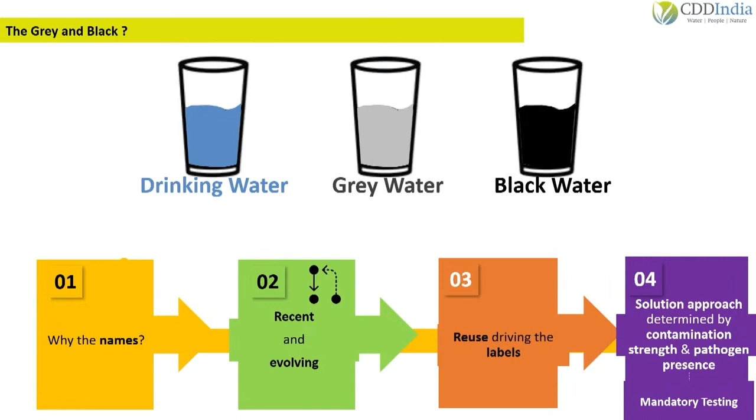Now can we move to next please? So we have this drinking water, and the next session is on black water, and then we have grey water. But black water is never black. How many have seen black water that is black? But then why do we call it black water? And grey water is not always grey. It is turbid, it may be yellowish, it may be translucent, it may be white yellow, anything. Sometimes grey too, but we call it grey.

So the whole point of liquid waste management is that we have to take care of two things, which are contaminants and pathogens. Pathogens create health hazards and contaminants create environmental hazards. Can we go next please? So drinking water, if we see from the pollution angle, has a biological oxygen demand of 2. These are the CPCB standards. And black water has a biological oxygen demand of minimum 10,000, which goes up to 50,000. And whatever is in between is called grey water. So in that sense, grey water has a very huge range.

And the problems are just different. To give a very gross analogy, somebody has got a cough, somebody might have a viral fever with cough, and somebody might have TB. You would not give the same paracetamol to all of them. So different pathogens and different contaminants require different treatments. And that is one thing which has to underlie every intervention.

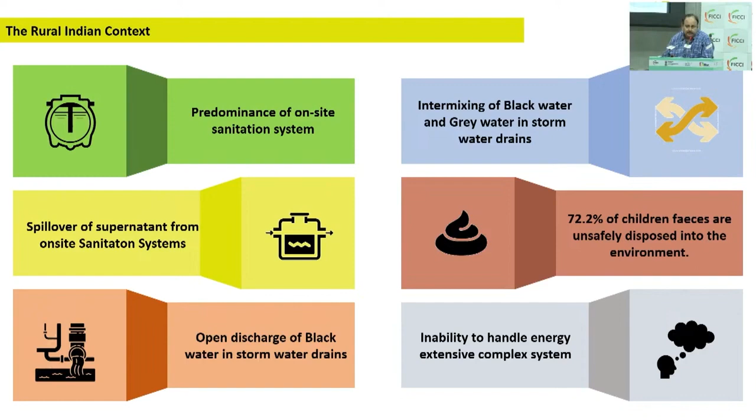And also, grey water has got many evolving constituents. What we say is grey water is considered black water in other countries, like kitchen waste. We consider it grey water, but because of its high concentration of contaminants, it is considered as black water in many countries. So the solution has to be seen accordingly.

Now these are some of the data points: how the drainage and disease burden is increasing because of poor wastewater management in rural India. You can all have a look. The figures are self-explanatory.

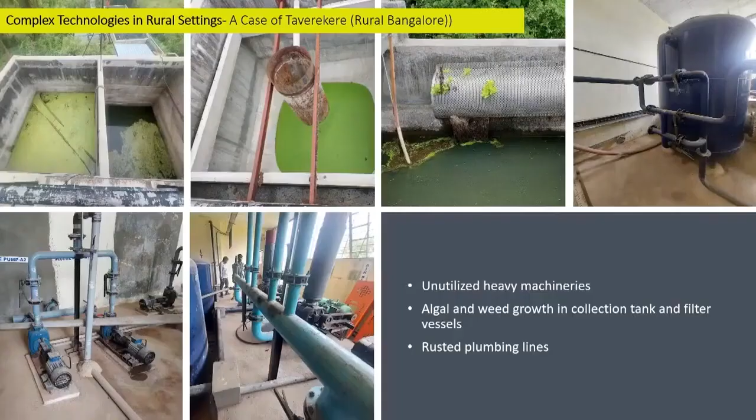Now this is what is happening. So many places we are going with complex technology in rural areas, which is simply not working. So this is a modern conventional system which has been set up 5 kilometers from our office in Bangalore, and within 6 months it stopped functioning. Now there is algal growth. So the treatment system itself has become bimar, or sick. It itself needs some treatment. So these complex solutions need not be operated in rural areas. If we do, the seeds of failure are sown from day one.

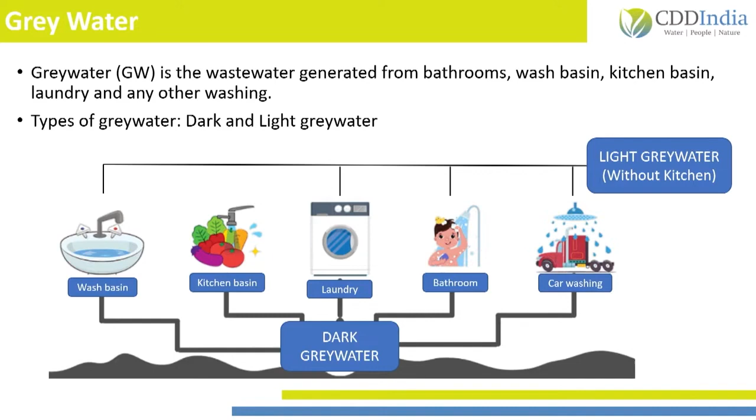So this is what I was saying. Grey water has got different constituents. You have got light grey water and dark grey water. If you include kitchen waste, the concentration of waste will increase. You need to have a different treatment system for that. And why is that important? Because of a very high public health risk, and I will come to that.

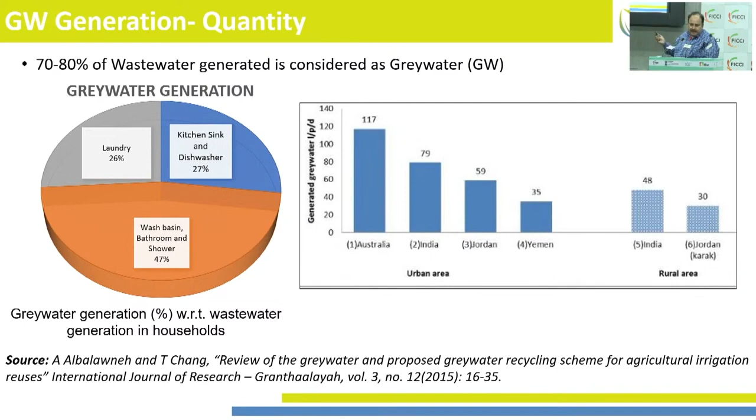So these are some of the figures. These figures are slightly dated. About 5 years ago, the per capita generation was about 55 liters, 48 liters in India. The figure will go up as JJM comes into being, because the water consumption and water availability will increase in the villages. So these are some of the characteristics of black and grey water,

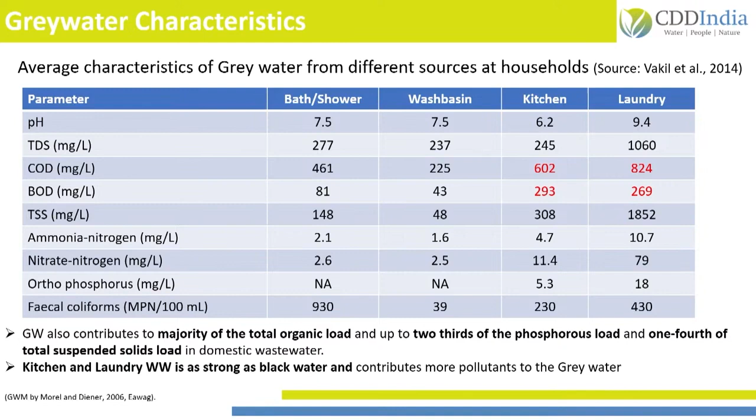and you can see that for kitchen and laundry water, the COD and BOD, which are the two key constants for defining grey water concentration, are as good or as high as black water. For others it is lesser, but the contaminants become high if you add kitchen and laundry water in the grey water.

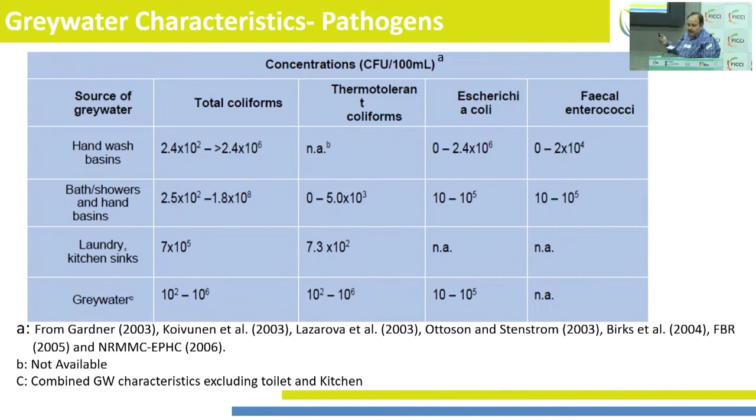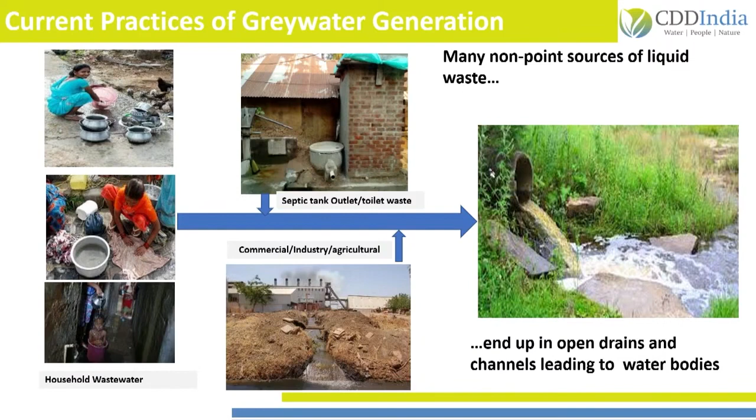These are again the pathogens. The pathogens are also present because whenever there is human urine or human waste out there, there will be some pathogens which will get mixed into grey water. So this is what is happening. I will again reiterate the point, there is no single pure grey water source in India. Most of them will have some level of contaminants.

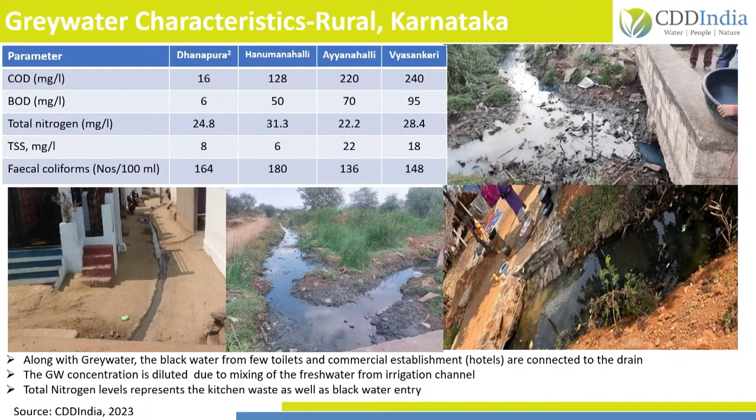And some of the characteristics you have seen in rural areas of Karnataka, where it has gone from 50 to 100. Again, wherever dilution is high, because of higher water availability, the concentration is lesser. But wherever the availability of fresh water is low, the concentration is high. So again, the contaminant load of grey water and black water will depend upon lifestyle, or what is going into that system, the relative weight of kitchen waste or other wastewater going into the system.

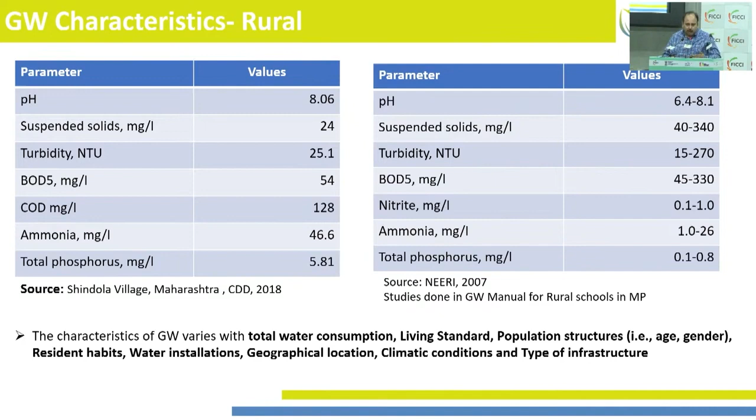So again, the main point which I'm trying to emphasize is that there is not a single fixed formula, because you have got a very wide range of problems which will depend upon various factors that define your grey water. Hence, you need to test grey water strength before providing any solution.

So soak pits are one of the most common decentralized systems available, but they would not work in high water table areas. And one more point is that soak pits do not allow nitrogen decomposition or the nitrogen cycle to get completed. Once it is in the soak pit, nitrification and denitrification, which are two very essential elements of the nitrogen cycle, do not happen.

And it has a very huge public health risk, because if nitrogen does not break down properly, it creates nitrosamines, which are carcinogenic, and there is a very high correlation between high nitrogen in water and thyroid cancer and gastric cancer. For your information, the US FDA does not allow any nitrosamine to be generated in any medical products in the sterilization process.

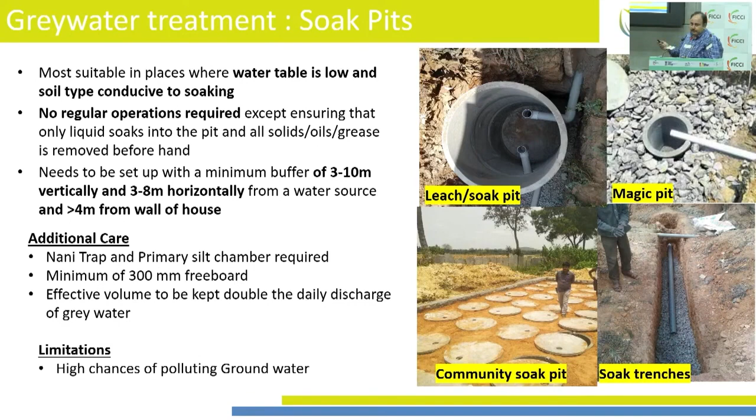And the rules that it has to be 5 meters, 6 meters, 8 meters between the water source and soak pits were based on a study done in the 1950s in India, and that study was based on certain assumptions: that it had to be sandy soil, the slope had to be a certain type, and then it was felt that the safe distance between soak pit and water source could be 4.5 meters, with a margin of error taken to 6 meters.

But whenever these assumptions do not hold, when the soil is coarse, when the water table is high, whenever there is a problem of slope, or if in the geology you have a rock surface with fractures, these assumptions will not work. So soak pits will not work everywhere. You need to be careful of the assumptions underlying this principle. Since many a time we are not aware under what assumptions these soak pits were promoted or recommended, we end up making mistakes.

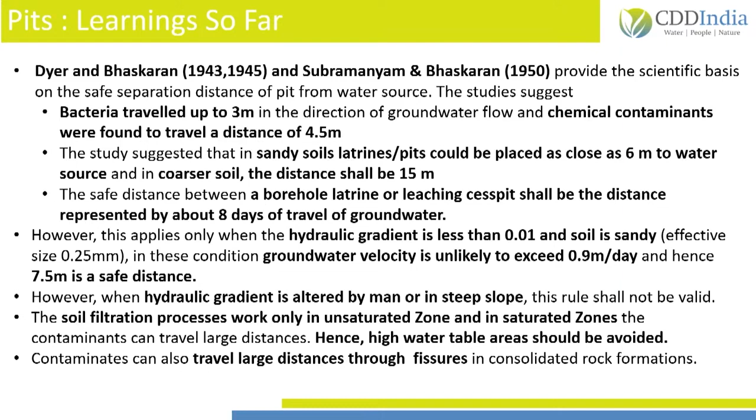Now, this is what I was saying about the nitrogen challenge. Grey water essentially has human urine, and 80% of whatever nitrogen is discharged from the human body occurs in the form of urine, not excreta. So if you have urine in your grey water system, it is going to create a nitrogen problem which needs to be fixed. Otherwise, we are in a problematic state. And again, nature comes to the rescue here.

If you try to use conventional systems for nitrogen removal, it requires a huge amount of air. And the nitrogen does not get removed from the water unless you have your carbon removed. For removing nitrogen, there are two processes: nitrification, which requires excessive oxygen, and then denitrification, where an oxygen-deprived environment is required. So it requires two contradictory chemical stages, which in a conventional system will require a huge investment.

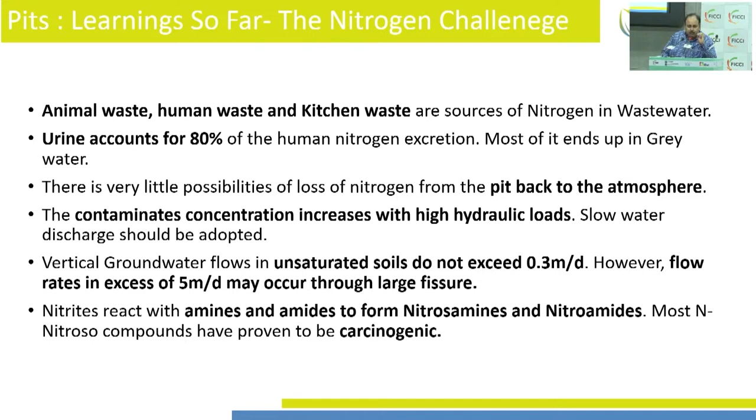The best option for treating nitrogen in nature remains application on soil, because if it is exposed to the air while going to the soil or when getting discharged, nitrification will happen. When it is seeping into the ground, the anoxic environment will take over and the natural bacteria will complete the process of denitrification. In rural areas, these nitrogen-rich elements should be applied on the ground because, A, they will reduce your fertilizer consumption and associated greenhouse gas emissions, and second, they are the most cost-effective methods of dealing with nitrogen.

So these are a few factors while dealing with grey water management. We need to take care of the strength of grey water, space availability, and soil type because of permeability. If there is black cotton soil, the water will not percolate and it will flow back into the system. Then there is high water table, because if the water table has the contaminants, pathogens will get into your water stream and can be transported any length.

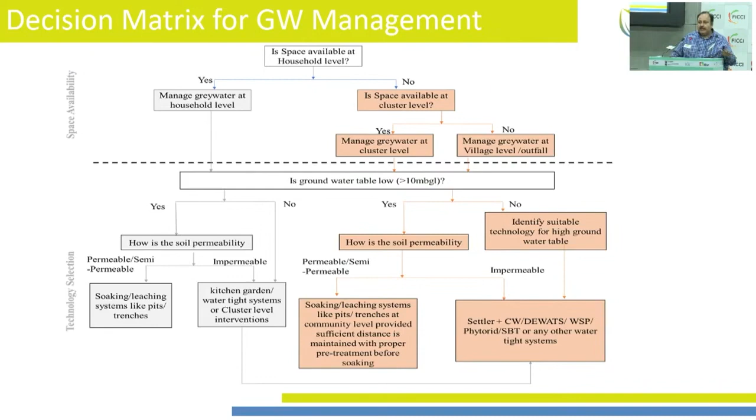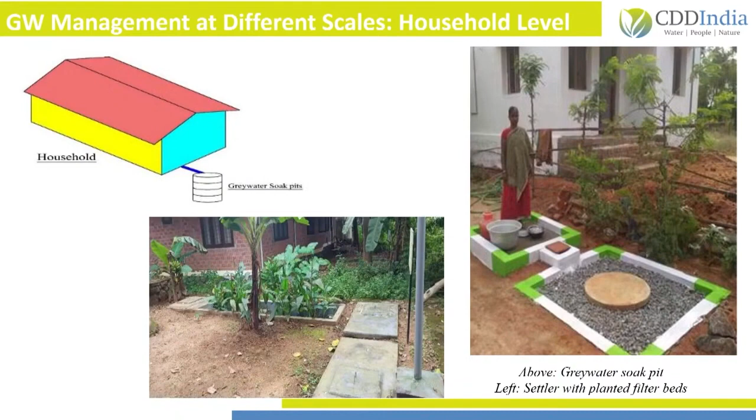Like I was saying, the 4.5 meter or 6 meter distances are for wherever there is a soil layer. If the water layer gets in between, then the contaminants and pathogens can be carried over any distance and may create a health crisis. So generally, we should have a system where we can have carbon removal and then some wetland where nitrogen fixation takes place through the root zone of the plants. These are some of the cost-effective ways it can be done at a decentralized level, at a household level, or at a cluster of households.

If you have larger spaces or a community center, then waste stabilization ponds, community soak pits or DEWATS are necessary. If you want to go for a waste stabilization pond and the strength is higher, please put up an aeration unit. And you will have to figure out how to do the maintenance of that. Otherwise, the system will not function. After a few months of operation, it will start stinking and create another odor problem.

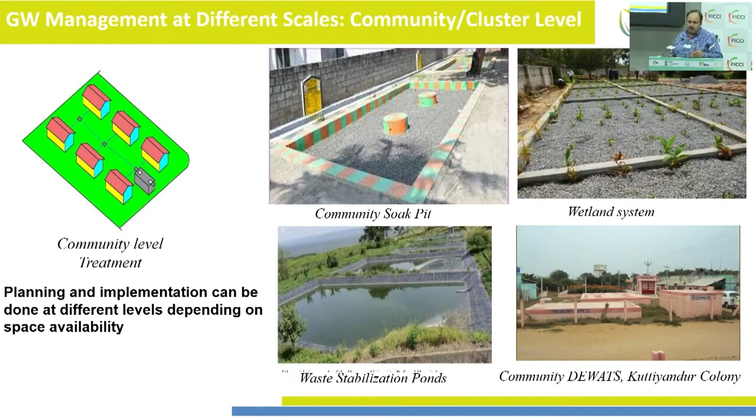So again, depending upon the strength, if it is less than 50, please go for community soak pits or any soak pit systems because it will not contaminate the environment or groundwater aquifers. But if it is of higher concentration than 50, please go for a higher order solution which takes care of the organic part.

And if you have a reuse policy, so before designing any treatment system, have a policy of reuse of grey water because this water is in scarcity and this nutrient rich water can be safely used in agriculture. So why not use it in agriculture, rather than waste energy, because a huge amount of energy will be required, and then two very contradictory environments of oxygen rich and oxygen poor will be simultaneously required to treat it.

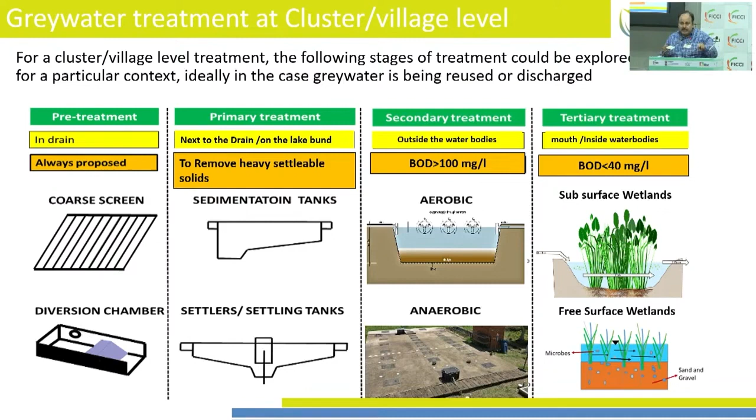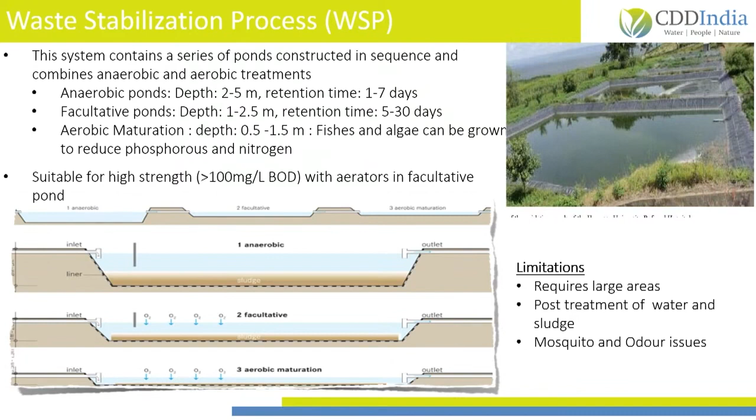So this is a waste stabilization pond. It has got three features. It is available in Google or anywhere. You can just see there are three stages: anaerobic, facultative, and maturation pond. But again, if the strength of wastewater is high, the problems will be there for its operation.

Then DEWATS is a system which has been pioneered by CDD. Again, it is nature-based, plants and operation. Only civil construction has to be taken care of, and the system can work. And then you have a free surface wetland. But again, mind here, it will not work on higher concentration. For less than 50 BOD only, we should apply these solutions.

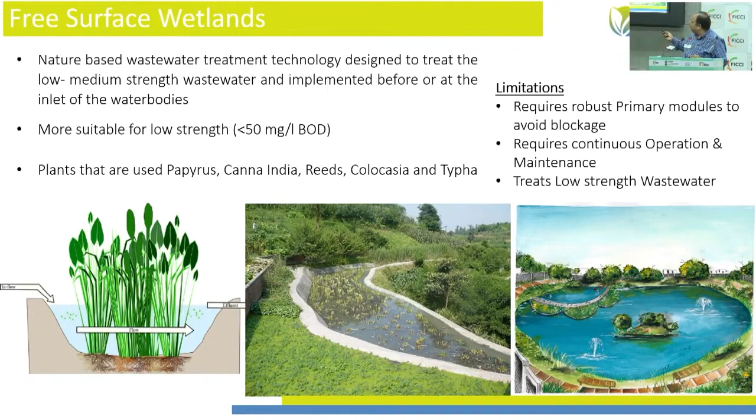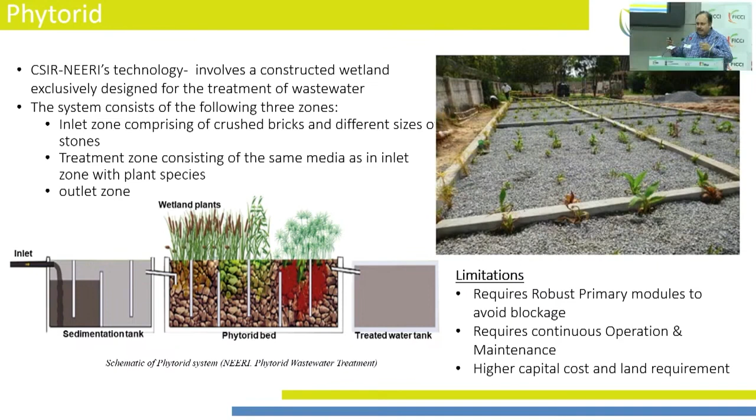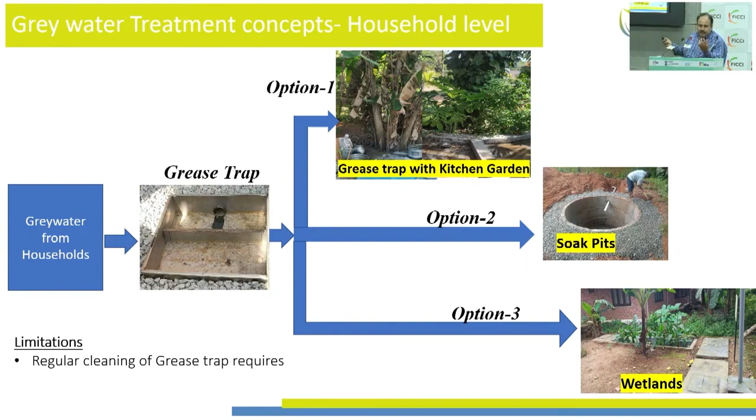So at a household level, whenever you are doing a system, please have a system for grease removal because the fat will be a component which will get into the wastewater from the household kitchen. And if you do not take care of it, again it will percolate into your soak pit systems and then it will create a film and the water percolation will decrease and the system efficiency will get reduced. And then you can have a soak pit or wetland depending upon the concentration and nature of the wastewater.

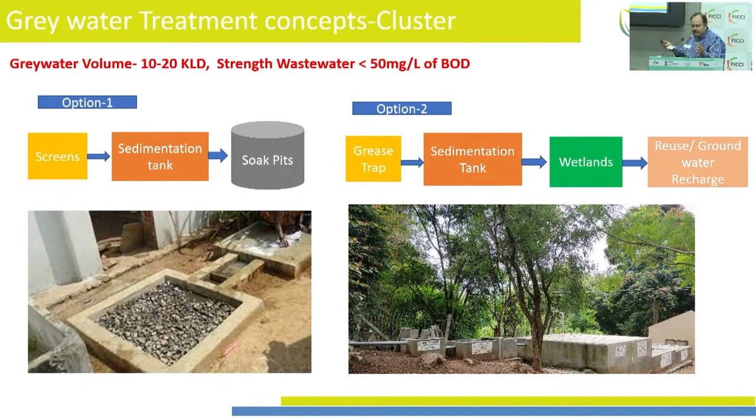So these are some of the systems which, again depending on the strength, at decentralized level, household level, community level, cluster level, can be easily designed.

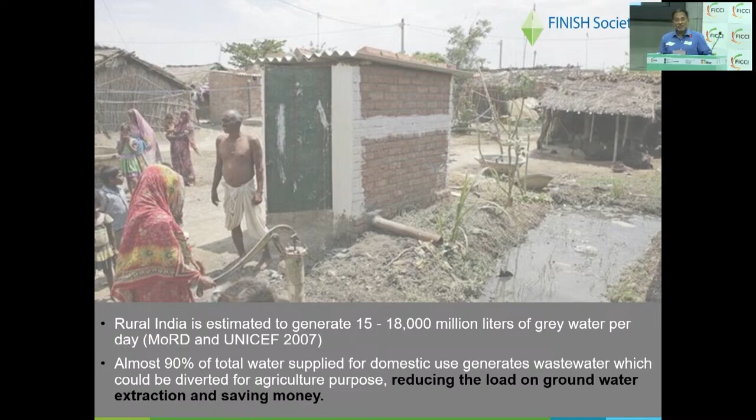So, this is a matter of great interest and also personal concern for me because as you can see, a 2007 study put an estimated 18,000 million liters of grey water being generated. And a recent article I was reading in Down to Earth estimated 31 billion liters of water daily. This is a 23rd of August article. And in that article again, they say that if 50% of that were to be treated, then it can reduce water scarcity. So that's the kind of opportunity which we have in front of us.

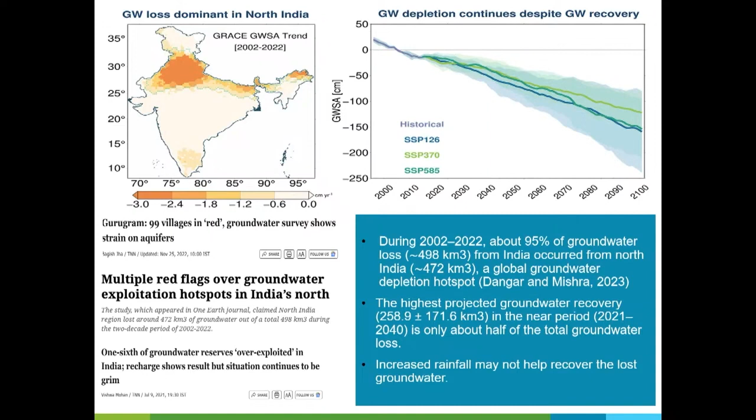And because you see, on the other side, the kind of hotspots that are there, right? And groundwater is getting majorly depleted all across. And this is a concern which can be addressed. It's also an opportunity for all of us, if we were to address the issue of grey water treatment.

So it began in the year 2009, and because the model itself was a success, it has today gone to 5 other countries, and we are now looking to expand the number of countries further. 4 countries in Africa and our neighboring Bangladesh, plus India, of course. Besides sanitation, we also work on solid waste, liquid waste, which is the topic that has been given to me here, fecal sludge, WASH in schools, and of course, we do some research on these areas.

So our initiatives in wastewater are related to water. We of course realize that it is directly linked with civilizations. When you look at civilizations, we typically find that all civilizations began along a river basin. So when they talk about the Nile, when they talk about the Gangetic Basin, that's where the importance of water actually is. And we, as an organization, do not have any technology, so we are technology agnostic.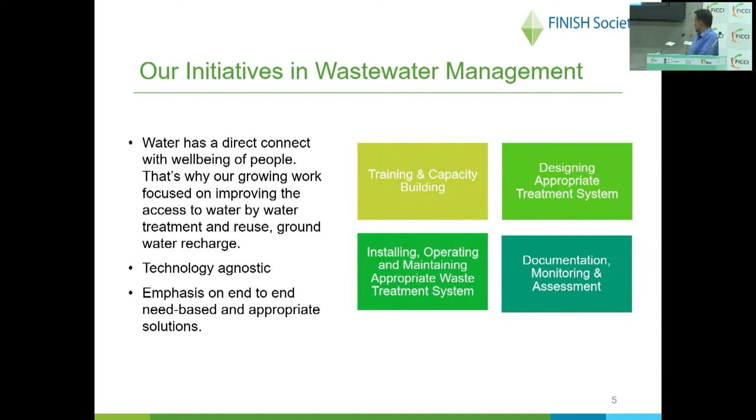We look at solutions which are most appropriate, and how we go about it is we look at it from an end-to-end perspective, with the idea that the solution has to be most appropriate and low maintenance. We do capacity building related to that, designing appropriate treatment systems, installing, operating, and maintaining the same. Of course, creating the ecosystem so that it can sustain, and monitoring before handing it over. This is our overall strategy.

A couple of areas that I would just pick out from here would be the selection of appropriate solutions. As Harshji earlier spoke about, when you talk about grey water, it has a vast gamut, right? It's quite a vista. And before we identify the solution, we try and test it. In fact, we also learned it the hard way. We were given an assignment by a ULB down south in Punampatti, and we had completed the design for treating that particular drain. Having done that, we made the mistake of not testing the input water.

When we tested the input water, we realized that there was grey water. It also had black water, that is, septic tank flows were coming into it. So we had to change our entire design model. So it is from that particular point that testing and selecting the appropriate solution came in.

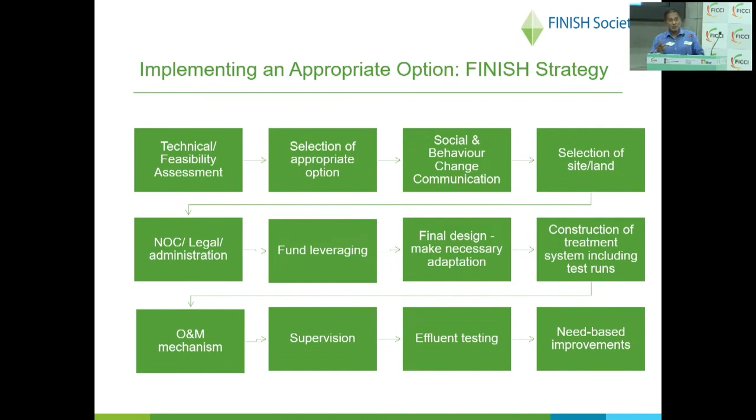And the other point that I would look at is when we begin the program, we also look at the end. So, what happens to the water that is there? How is it going to be used, and what kind of impact will there be in terms of the net result? Because this evaluation is what makes grey water treatment interesting, right? What is the kind of ROI that we are talking about? If any amount of money is invested, what returns will that particular ULB or the community get from it? And this is evaluated.

It's not an easy task, and we also have not found a very straightforward or very clear answer to it, because in many parts of the country, water is still not monetized. So that is also a challenge. But we have tried to do it through proxies, and when we see some of the examples that I intend sharing, maybe I'll be able to communicate that idea better.

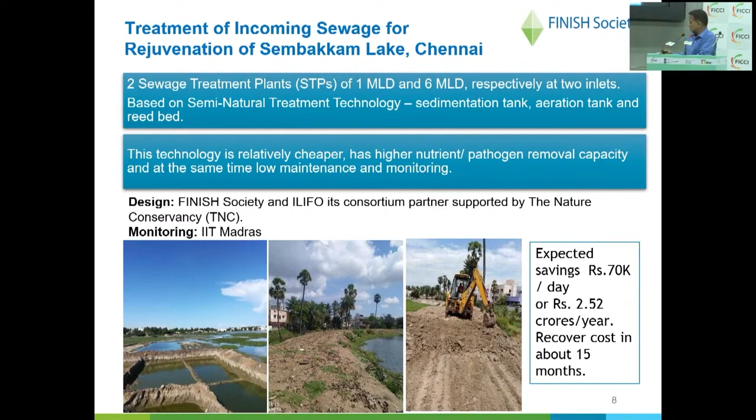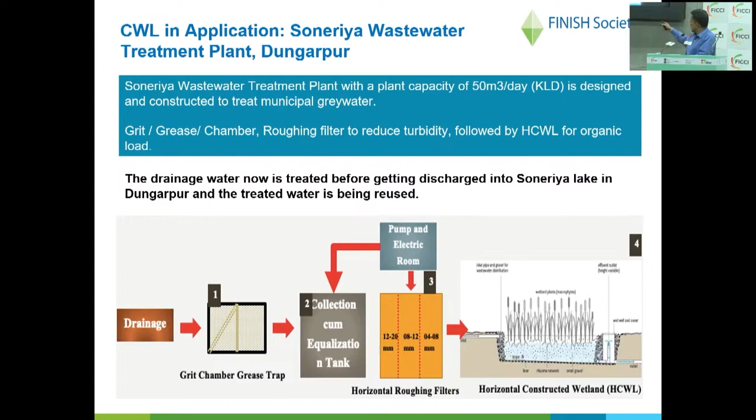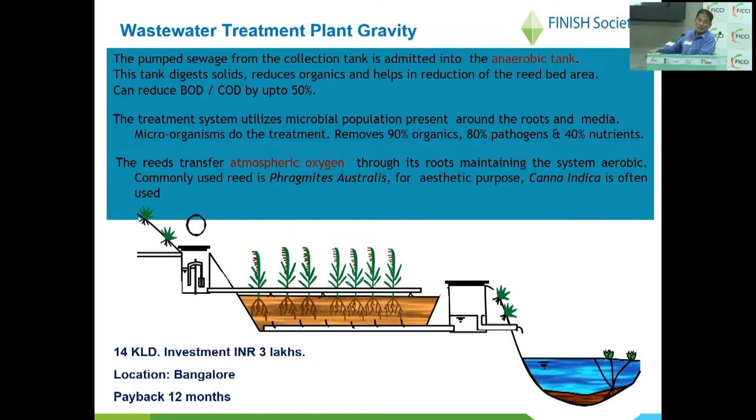We have got this type of plant, one in Bangalore, which is a 14 KLD plant. This is about 10 years old now, and it had cost then about 3 lakhs. The payback period that we calculated was 12 months.

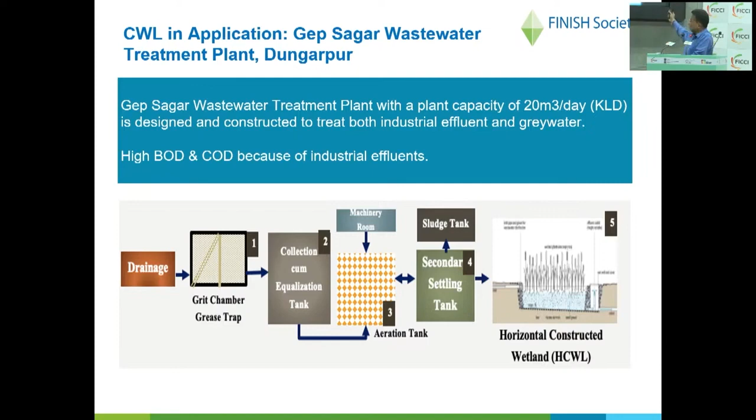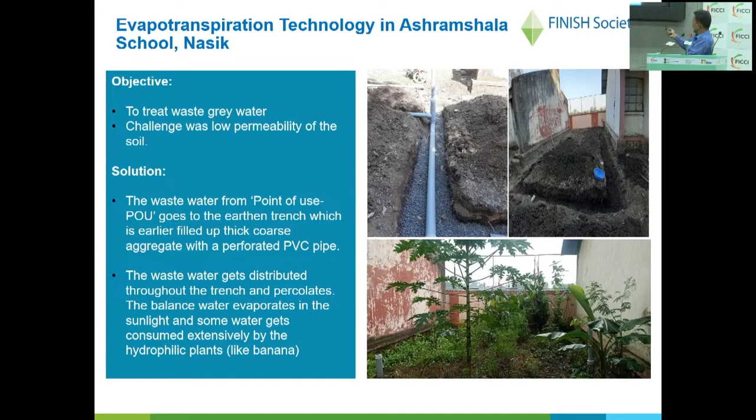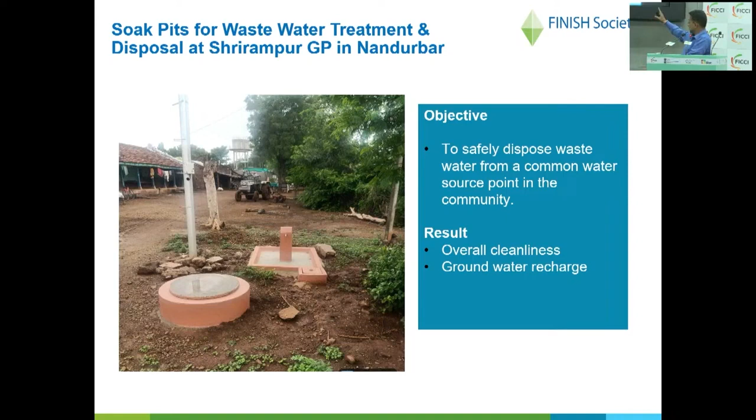This is a community system for the hand pump over there. So the wastewater that is there can be taken out and does not mess up the village.

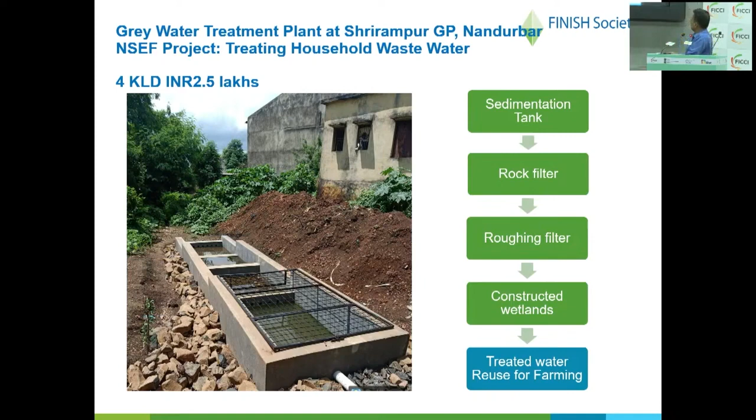Lighthouse Initiative, handful ITC is already here. ISC, of course, we are working with them at multiple locations, wherein liquid waste, solid waste, all that is a part of the initiatives there.

IEC is another key component in the entire thing, because in our experience working on grey water, we have noticed that without behavior change, getting the community involved in the process, things fail. While doing this Dungarpur plant, for example, it was bang in the city, and without getting the community on board, in the initial days people would come and throw plastic bottles in the wetland, or choke the filters and not maintain them. So we had to organize the community, get the shopkeepers on board, so that there was somebody to look after the plants, because our presence is only limited — we are going to withdraw from that side. So behavior change is an integral part of the entire process.

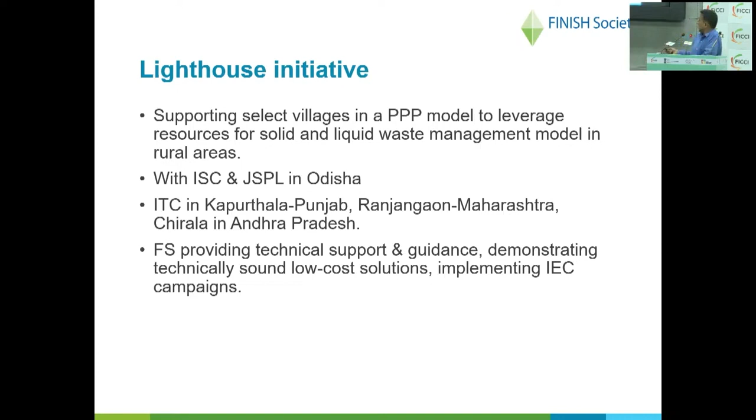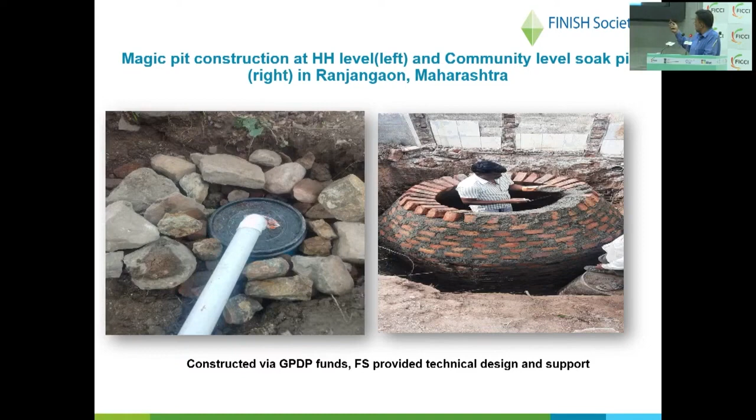There's a picture from one of the ITC areas. This is again a community level soak pit, what my team calls a magic pit construction, in Ranjangaon. Thank you.

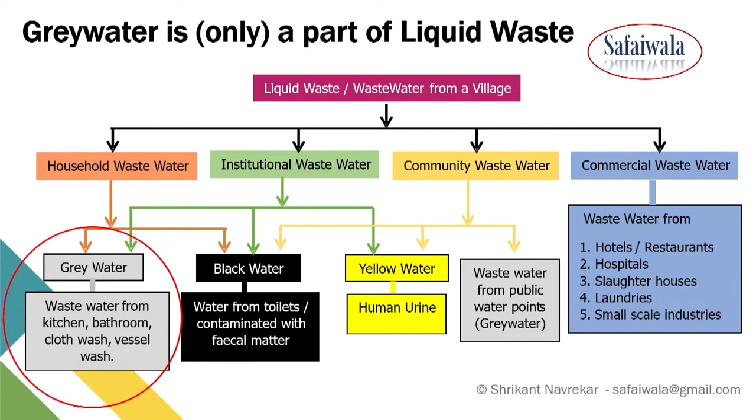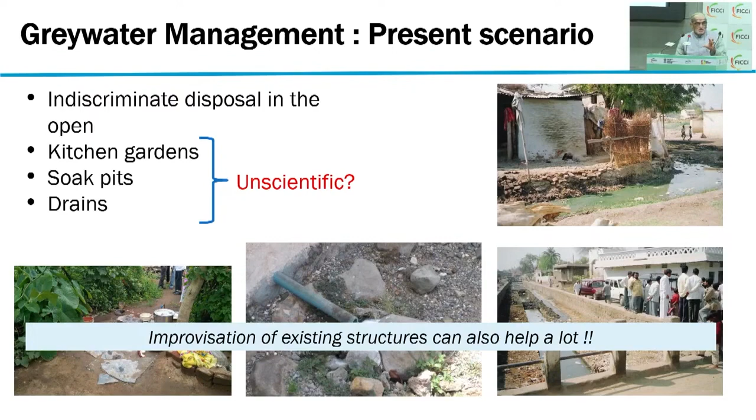So improvisation of existing structures should also be a form of our program, so that within the budgetary limits or within the limits of the people, we can improvise the scenario.

Now, what could be the appropriate solutions at decentralized level? We all know that like solid waste management, there are also 3R in liquid waste management: reduce, reuse, and recharge. For reduce, there are no technologies, but judicious use of fresh water is very important, so that minimum quantity of grey water or minimum quantity of liquid waste is generated.

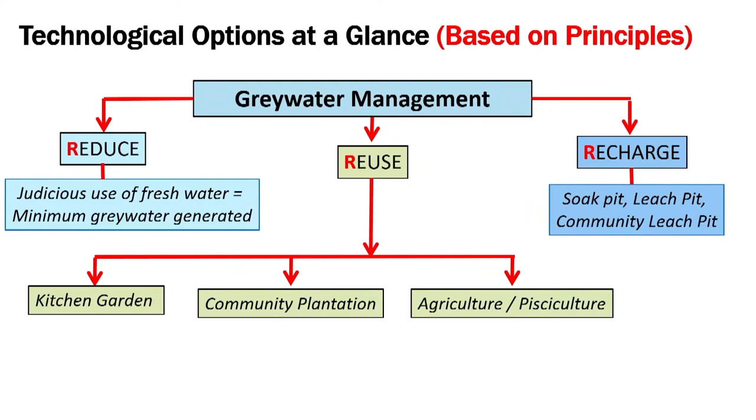Now this is based on principles, but again based on levels. The first level would be decentralized, that is household level management. And I would insist that we should first start with the decentralized level, whereby we can have kitchen gardens or pits. But it is observed that in a GP, if this decentralized technology is not possible, we immediately jump to the centralized one.

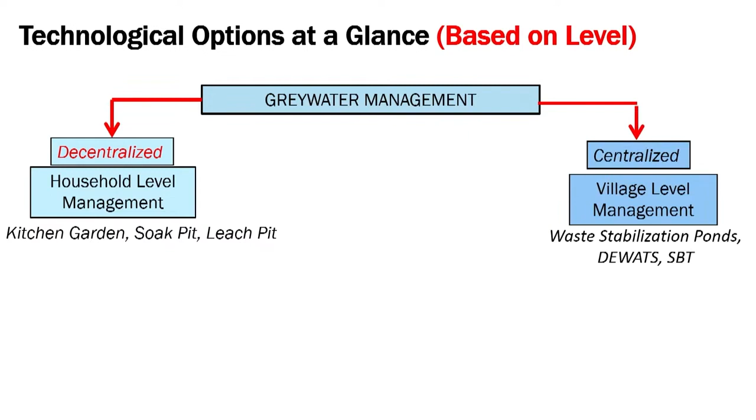But we should keep in mind that in between these two, there exists one more level, that is semi-centralized. What is this? Now, this again has two subparts.

One is management of greywater from a group of houses where decentralized treatment is not possible collectively. Second, in a village there exist public water points like hand pumps, stand posts, etc. that also need to be managed. This comes under semi-centralized or community level or cluster level management of greywater.

Based on level, there can be three levels in a GP where we can manage greywater. There can be situations where a mix of these three also needs to be considered. It is not that in a given GP only decentralized will work, or only centralized or semi-centralized is necessary. There can be a mix of all these technologies as well.

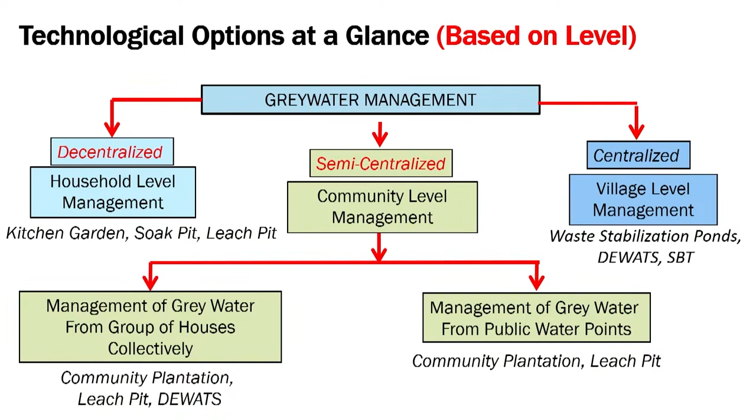Now, before going to the technology part, some pre-arrangements are very, very essential. What are these pre-arrangements? Let's look at this scenario.

For example, this house has a single assigned place where everything is done - bathing, washing clothes, scrubbing utensils, all at the same spot, not a proper platform. If in your plan you provide this house with some technology - maybe a soak pit, a leach pit, or a drain - can you ensure that this water actually goes to that treatment unit? You cannot.

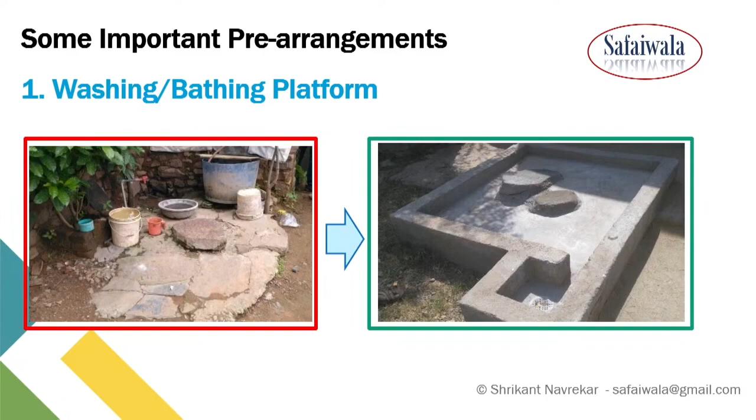That is why some improvisation is essential - just having a washing or bathing platform. This pre-arrangement is important, and that's why in our survey this also needs to be covered: whether that house has a structured bathroom or a structured place whereby we can ensure the flow of greywater into the treatment unit.

The next one - see this picture. This was the previous scenario, and now it is changed with a structural platform. Very simple and low cost intervention, but very effective.

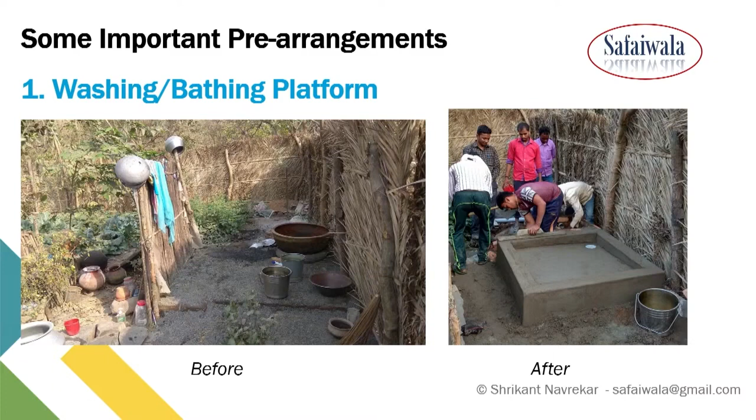The second one is the Nhani trap. People always forget this - a very simple but effective tool. What is the role of this trap? It avoids the entry of mosquitoes and the exit of foul gases. So at every discharge point - if the house has multiple discharge points, at each one, or if it has a single one, at that point - you need a tool like this Nhani trap. It's like a P-trap in a toilet. This is also an essential pre-arrangement.

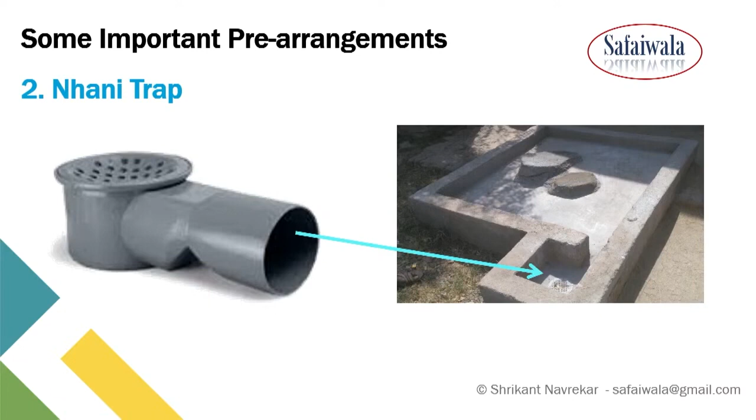The third one is the silt chamber. This is not required everywhere, but if you are going for a kitchen garden, a community greywater management system, or a centralized system, a silt chamber is a must. For community greywater management and centralized systems, two levels of silt chambers are required - one at the household level and one at the treatment unit. This is also a very important component of greywater management as a pre-arrangement.

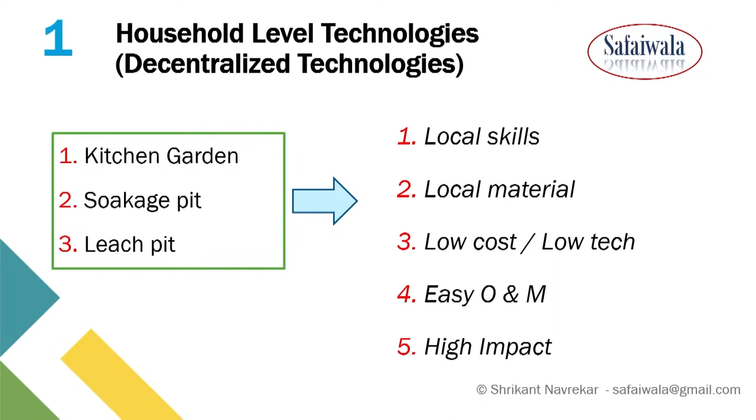Now, what are the technologies? At the household level, there are three very simple technologies we all know: kitchen garden, soakage pit, and leach pit. The beauty of these technologies is that they are based on local skills, require only local material, are low cost, low tech, easy to operate and maintain, and have a very high impact.

Now you know what a kitchen garden is, but I'll draw your attention that a kitchen garden is possible in any terrain - may it be hard rock, high water table, anything. Three things need to be taken into consideration: availability of space, quantity of greywater, and choice of plantation. Each kitchen garden is a separate unit and needs to be planned accordingly.

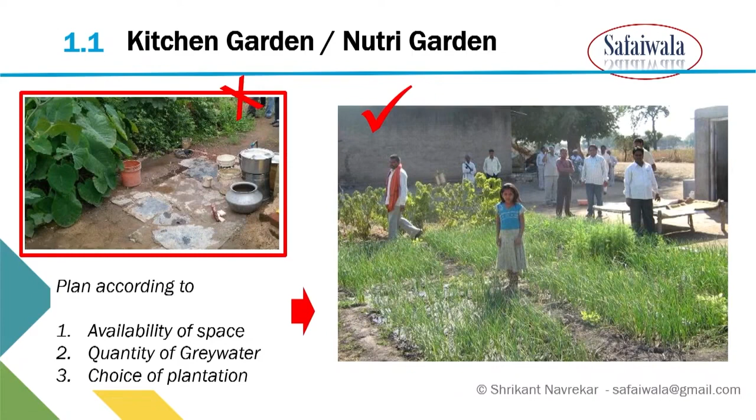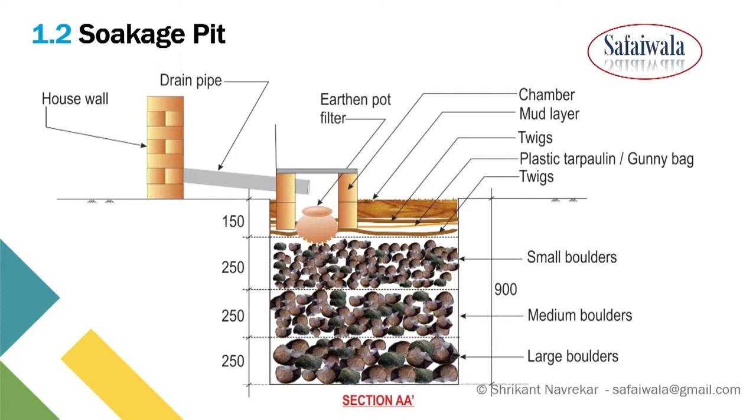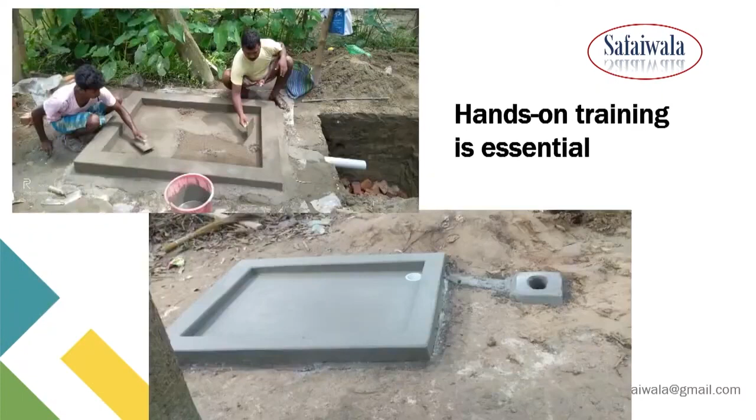The second one is the soakage pit - also a very simple and low tech technology for rural areas. You know the technology, I will not go into details; look at the pictures from the field. That is why hands-on training is very essential - although the technology is simple, it needs to be done very scrupulously.

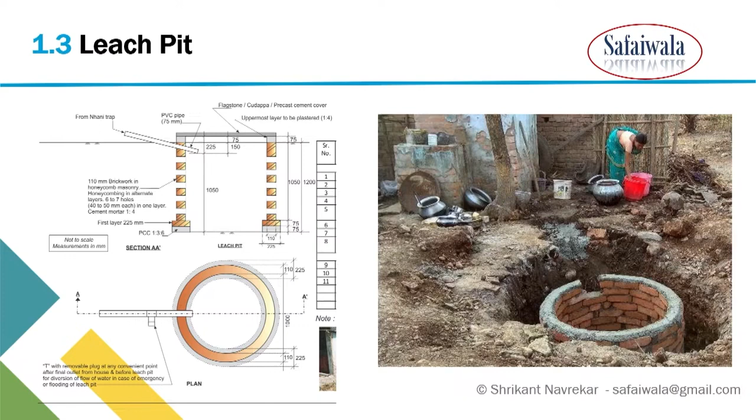The third one is the leach pit - a brick-lined structure, just like the pit of a toilet, which also works very wonderfully. I call it a 'fit and forget' technology. This works very well and can be a decentralized solution for the management of greywater.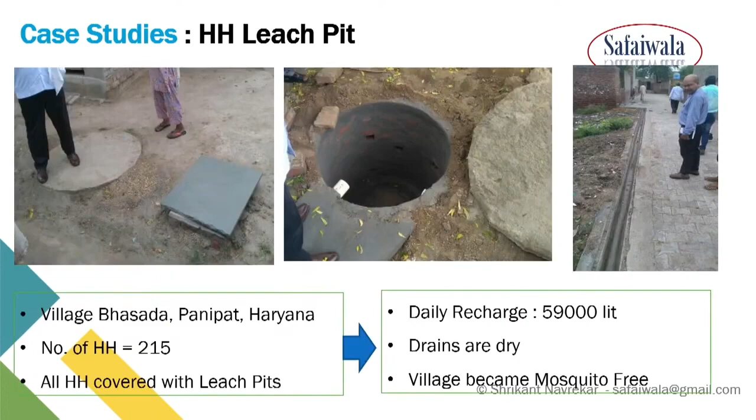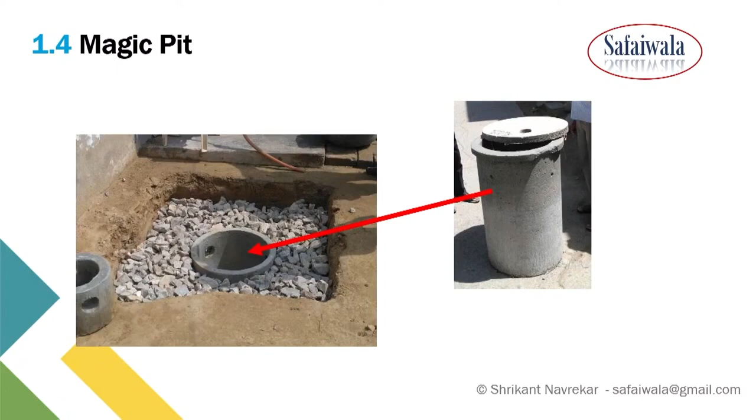The third one is the magic pit. You all know many states are adopting this technology. This is also a combination of soak pit and leach pit, and it also works very well in a decentralized manner.

Now, the second part is cluster level technologies. That means if it is not possible to deal with the individual household, this can be done for a group of houses. For example, if these houses do not have enough space or adequate topography for the management of decentralized wastewater, you can take this to a centralized place and utilize it in plantation, gardens or roadside plantation, so that the entire wastewater from these houses can be utilized. Just like a kitchen garden, this is a community garden.

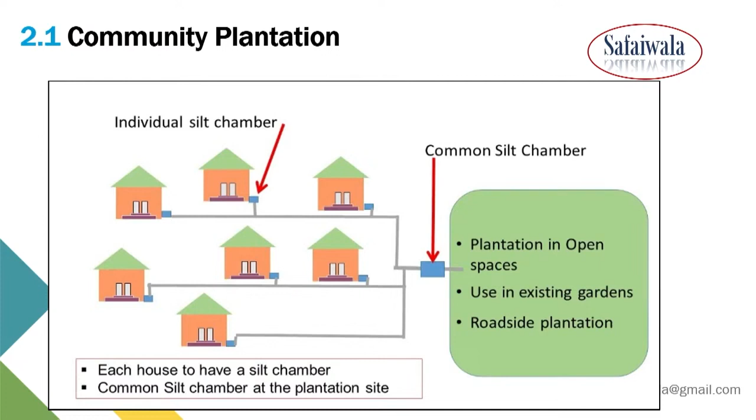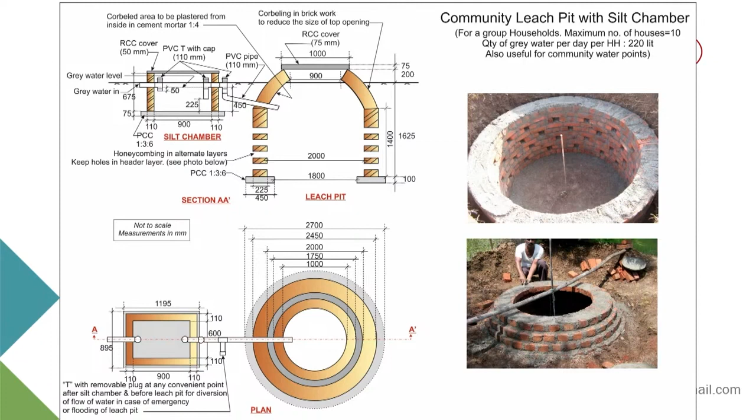And if space is the constraint, again, this can be replaced with a larger scale leach pit. Now, this is the community leach pit, which can be used for a broader group of houses, and this works very well. Of course, again, I will insist that it won't work to say "there are so many houses, so we'll make it big." You have to calculate the volumes and accordingly you have to plan. Then and then only it will work. Otherwise, the scenario is like this.

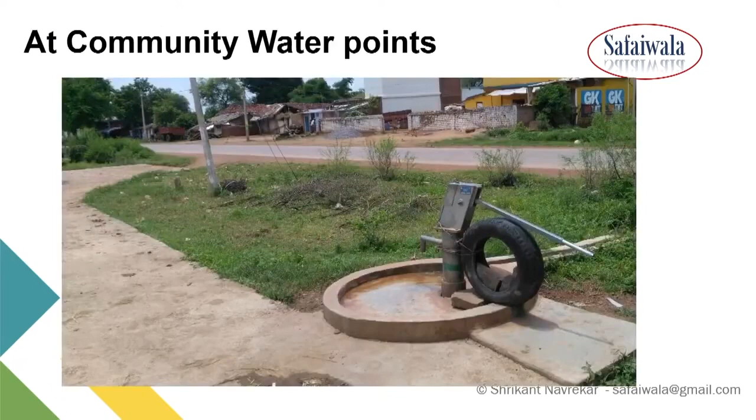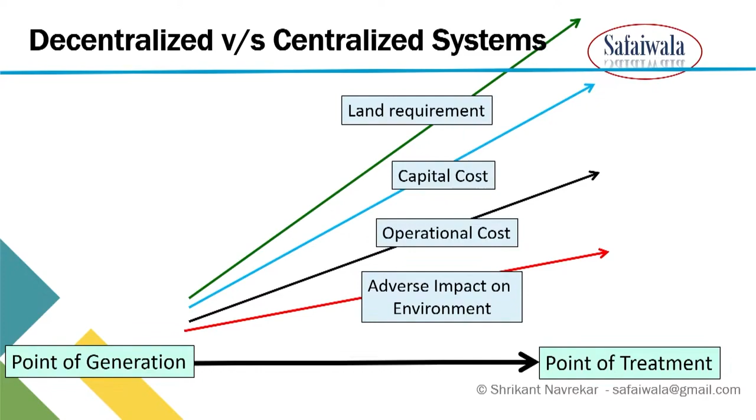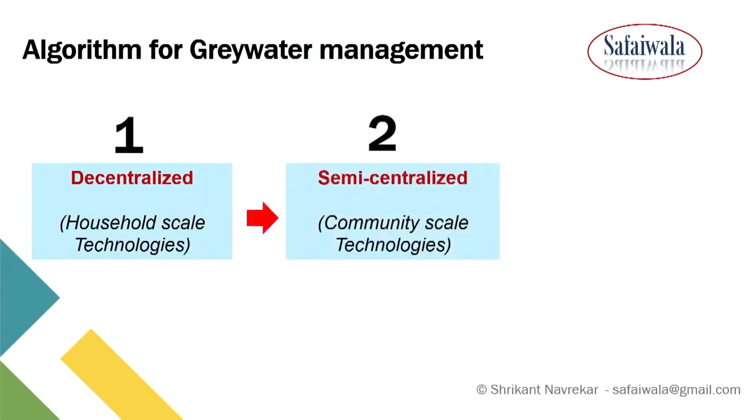Why decentralized? You know all. From point of generation to point of treatment of any waste, if we go on increasing the distance, these are the repercussions. Land requirement is high, capital cost is high, operational cost is high, and the adverse impact on environment is also high. That is why we should first opt for what could be the algorithm. Very simple. First try whether decentralized systems are okay. If that is not possible, go for semi-centralized. And if that is not possible, then and then only think of centralized ones. This is a very simple algorithm which you can follow.

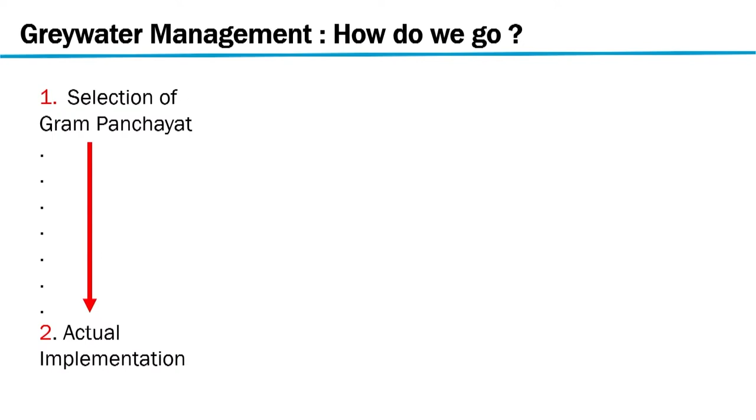No, if we want to have a sustainable grey water management or any waste management system, you have to follow this. Selection of Gram Panchayat, rapport building and demand generation. Many of us are doing this actually. Transect walk and PRA. This helps a lot. Then survey, waste mapping and resource mapping. That is also important. The fifth one is very important: plan of action involving community.

We call the engineers and ask what to do. No, let the community talk first, sit together, discuss, and evolve a plan of action. That may not be a very engineered plan, but that is important. Then DPR, then actual implementation and follow-up.

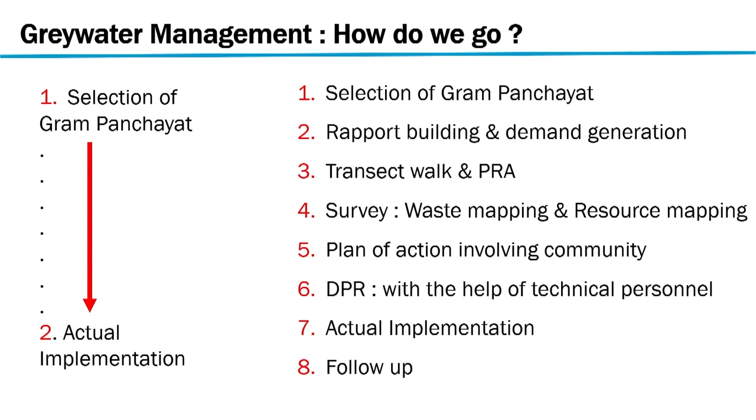This is very important. You must have heard this sentence: there is no rocket science in toilet. My counter question was, is there anything like toilet science? There is. So there is a science in soak pit, there is a science in leach pit, there is a science in everything. You have to follow that. That may not be rocket science, but there is a science. You have to follow it. And therefore, this is my last slide.